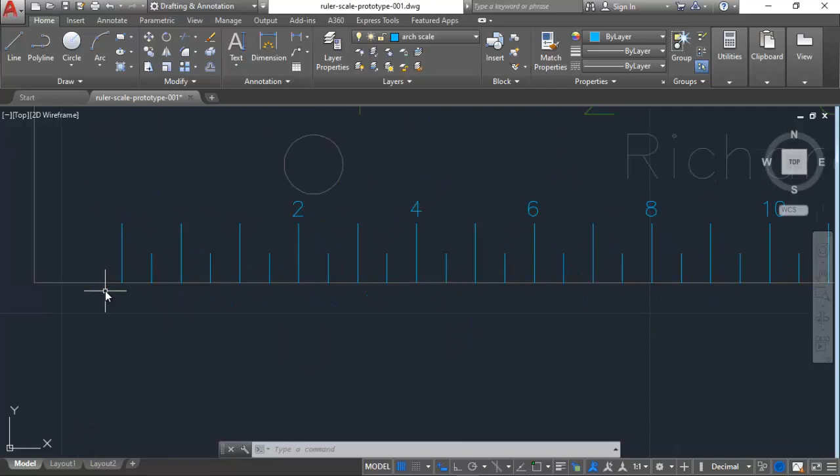So let's get started. I'm going to come up to this area right here and double check my text to make sure it's set correctly. I'll go to Manage Styles. It's definitely set to the dim.shx, which is what I want, and I got it set to a 16th. That's good. Go ahead and cancel that out.

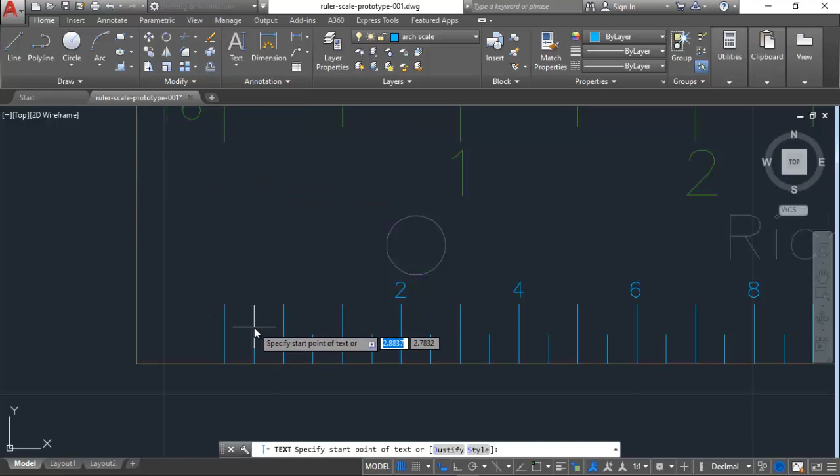I'll come up here and go to single line text. I'm just going to go about right there, and set an angle of 0, and put in the number 0. Then I'm going to come up here and click off to the side, and hit the escape command to get out of that.

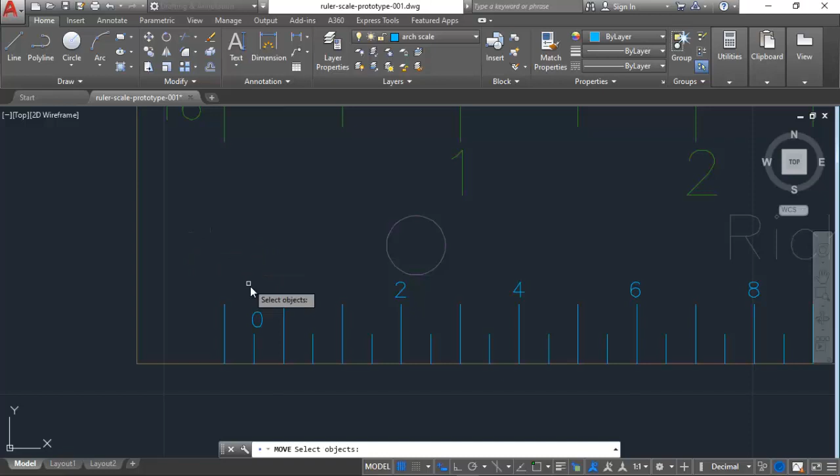Now let's go back and recheck here. I have my snap modes turned off, and my polar tracking turned off as well. That's good. You've got to have that, because when you try to move something, if polar tracking and snap modes are on, the text is going to be hard to move and get where you need it to be.

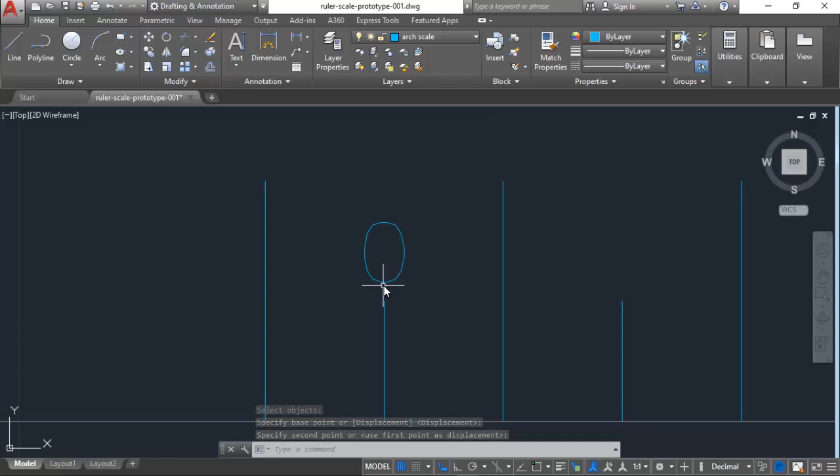So let's just kind of pan over and move this up. It says select objects. I'm going to select it first, hit the space bar, or enter, and set a base point here, and move it to about right there. Looks good. I kind of centered my crosshair up over the 1/8 inch mark here, as you can see it lined up that way.

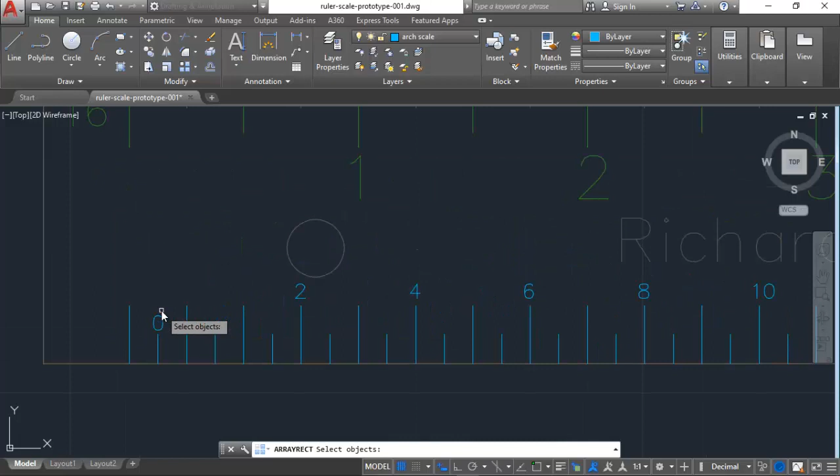Looks good. All right, now I'm going to zoom out, and it's pretty good right there. I'm going to go up here and set the array command, rectangular array, and it says select objects. You can see, I'll zoom up here, it highlights this. I'll hit that, and it's got this little matrix here. Well, that's not what I want, so I do have my settings that I know I want to work with.

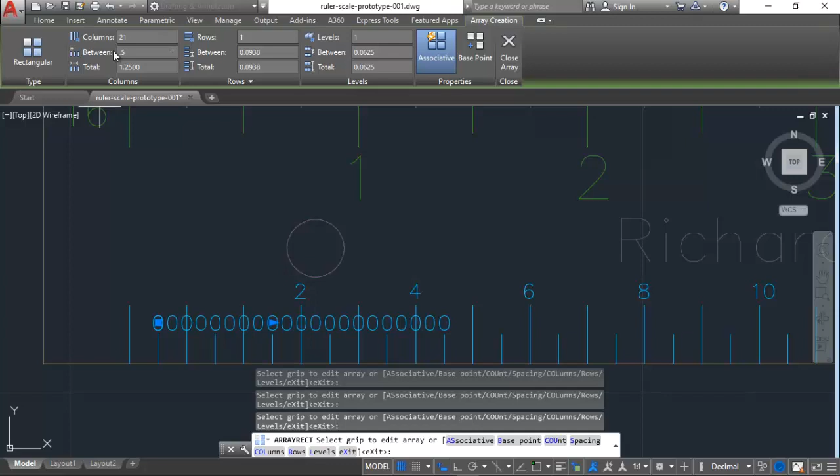I'm going to go with 21. I'm going to highlight this over here to 1 row, hit my tab. Now if you set up here and key something in, it doesn't change. It's only when you drag your crosshair down into the design space area that it makes a change. Now I'm going to key in 0.5, and again I move out, and sure enough, there's my change.

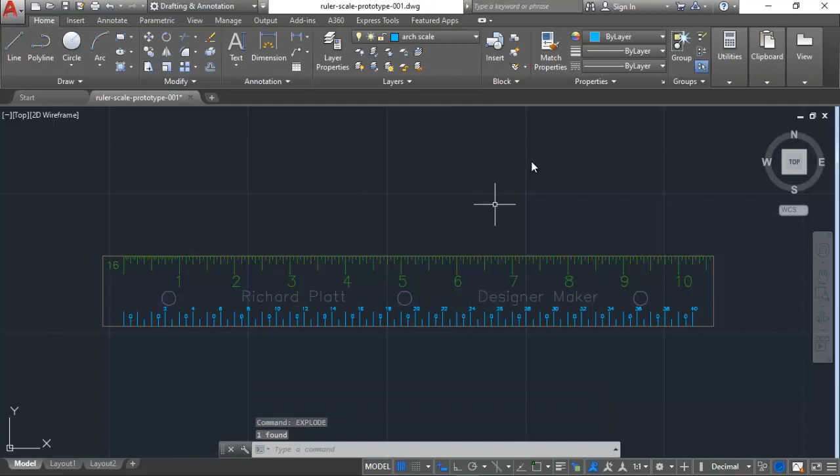So now you can see a series of zeros going all the way across there. That's good, that's what we want. So I'm going to go ahead and hit exit out of that, zoom out one more time. And what I want to do now is highlight all that text, and key in explode, E-X-P-L-O-D-E. Let's get that in there. Okay, and I'll select, yep, it's exploded all that text.

That's good. Okay, so again, on an 1/8 inch scale, it goes from right back to left. So my first number is correct, and every 4 tick marks, 1, 2, 3, 4, is the next number. It's basically based on 4 feet. So I'm going to select that piece of text there and take it to a 4, and then do this right here with this piece of text, and take it to an 8.

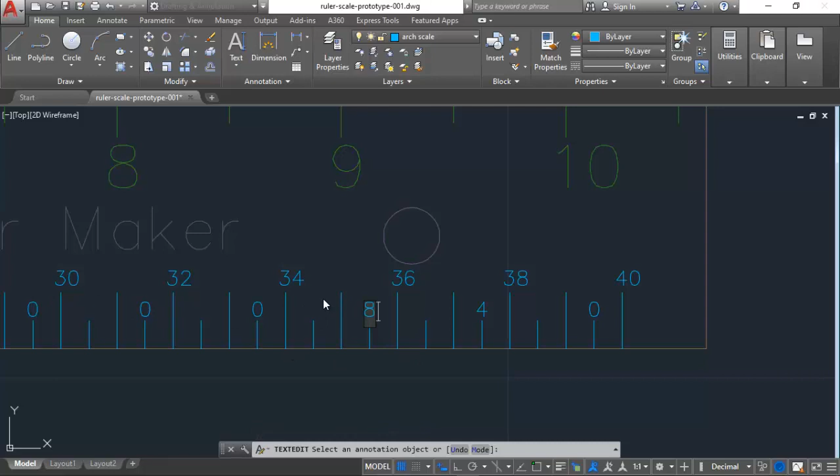So what I'm going to do now is scale up to this part right here, and we've got to put in the 1/4 inch scale designation. So I'm going to go ahead and use the copy command.

I'm going to grab this letter number here, select that, and specify a base point. I'll come over to about right here and place that in. Then I'm going to edit that using my text command, double clicking on it.

There we go. In this case, I'm going to enter 1/4 inches, using my double quote symbol for inches, and then finish that entry. I wasn't going to hit enter, just entered that, and it's done.

Now I'm going to copy that as well. I'll hit select, select the base point here, and pull that down to there. Then I'll edit this, making sure I got it correct.

That's it. So I'll double click this and say equal 1 single quote foot. Let me make sure it's an equal sign. Equals, and I'll give it a space for a little better readability. Okay, good. Now I have my scale designation here.

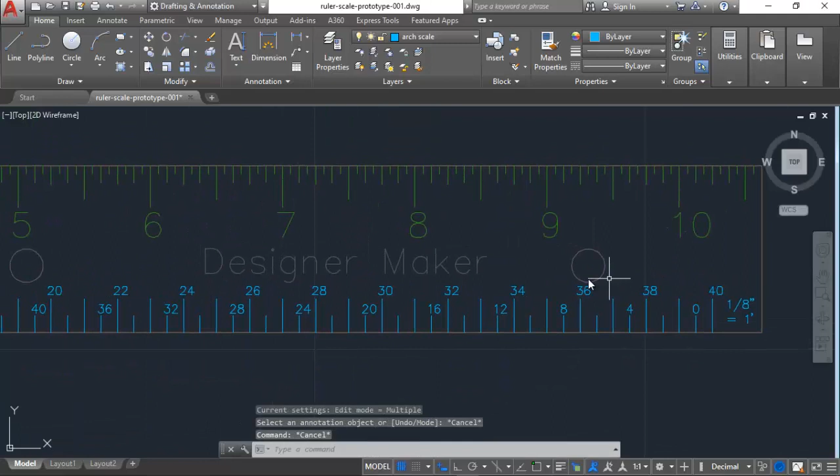Let's take a look at it. Now, I may have to come back and modify this, but for right now I think I'm going to be in good shape. Actually, I think I'm in really good shape. So let's pull that out, take a look at it, and let's go ahead and save our file.

And now what I want to do is come back to this in a moment.

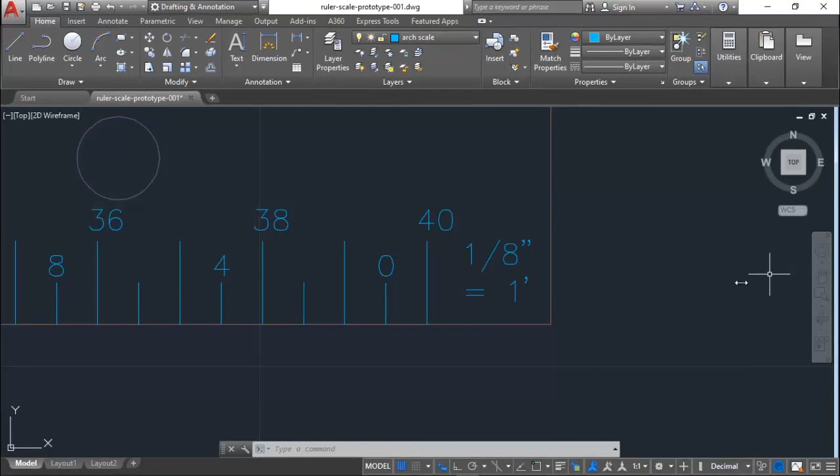Alright, now what I need to do is give the inches designation here for 1/8 of an inch. I'm going to zoom up pretty close to that so you can see it better. So let's double check some things.

Let's go down here to our dimensions and measure from here. I need to turn on my snap modes and polar tracking, particularly the snap modes. I'll click from here to there. Okay, that's 1/8 of an inch.

All right, so what I want to do now is divide that 1/8 of an inch by 2. I'm going to come over here and select my offset command, and give it a distance of 0.0625, which is 1/8 of an inch divided by 2.

And I will select this object here, and come over to that. All right. Now what I want to do is make that half the size.

So I'm going to come over to my line command, get my bisector or midpoint selected, and come across to that. Now I'll go to the trim command up here in the ribbon, select these two objects, hit enter, click and trim that off, hit escape, select him, hit my E command for erase, and there I have that half designation done.

Okay, now to see this on a laser engraver it's going to be kind of tough to see, because of the fidelity of the line that we need to get. The laser does a great job, no question, but we're going to have to divide this now by 2 as well.

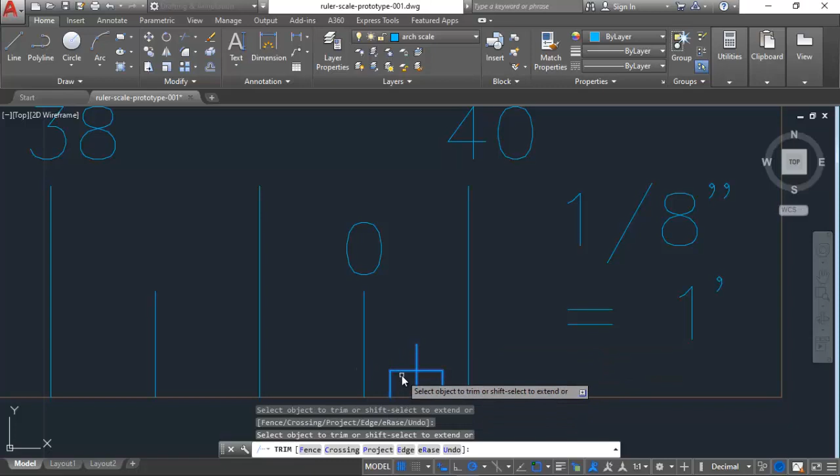Again, I'll do my trim, which is going to allow me to select these two objects. Hit enter, and then I'll trim this one, and I'll trim this one, and get rid of him, and get rid of him. Hit escape, just select him, he's gone.

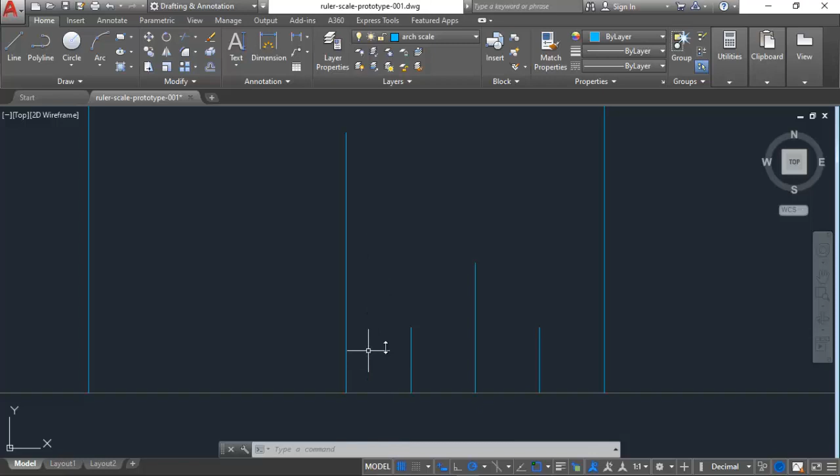That's pretty close, but when you look at the size of this ruler and you're trying to do something in 1/8 inch scale, you'll have to fudge between these areas, within a 32nd, which would actually be a 16th. But if I laser it, it'll be a 64th. If I copy these and divide them, the width of the kerf of the laser beam will be so big that you won't be able to see it on the actual scale. So that's just the way it is.

Let's do the same thing for this guy. We're going to use the offset command. We know that from here to there is 1/8 of an inch, so we'll specify a distance of 0.0625, hit enter, and select this one, here, there, and we'll do the same thing to these other ones over here.

Now we're going to use the midpoint and draw a line from here over to here. We'll escape off that. I'm going to use the trim command, select all these objects, hit trim, and trim these out. That looks pretty good. Now I'll hit escape, grab that line, and delete it.

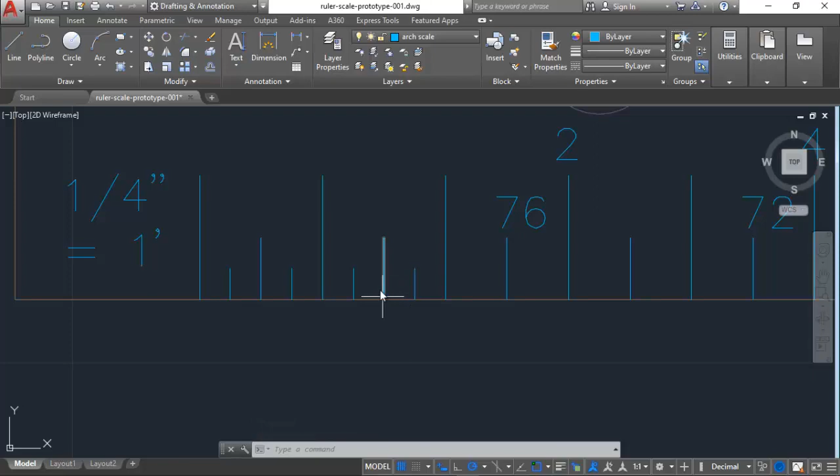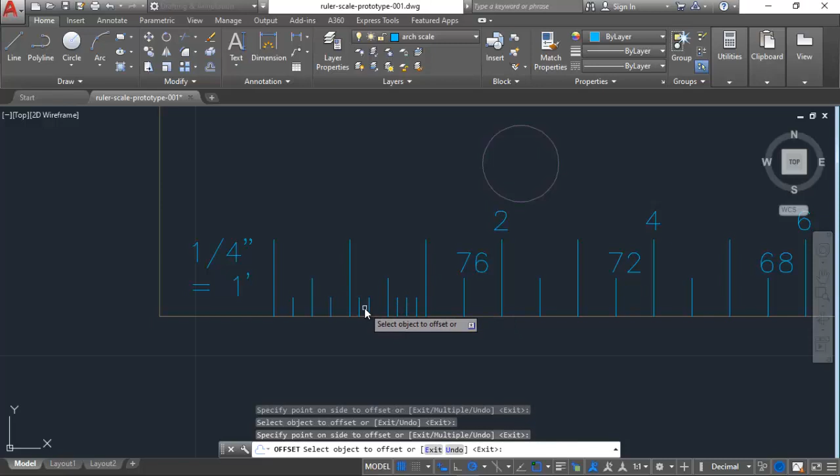I can make those a bit smaller from this point. Let's zoom out and look at this in reference. Yeah, I can probably go one more on these. So I'll hit the offset command again and key in 0.03125, hit enter, and specify my offset here. It's getting small, but let's see if we can make this work for us.

To make this a bit easier, I'll draw a line from here, go from about right there over to here, and then come down. I'll do an offset here, let's go 1/16 of an inch. That's too much, we'll go 32nd instead, so that would be 0.03125. Yes, much better. Select him, delete him.

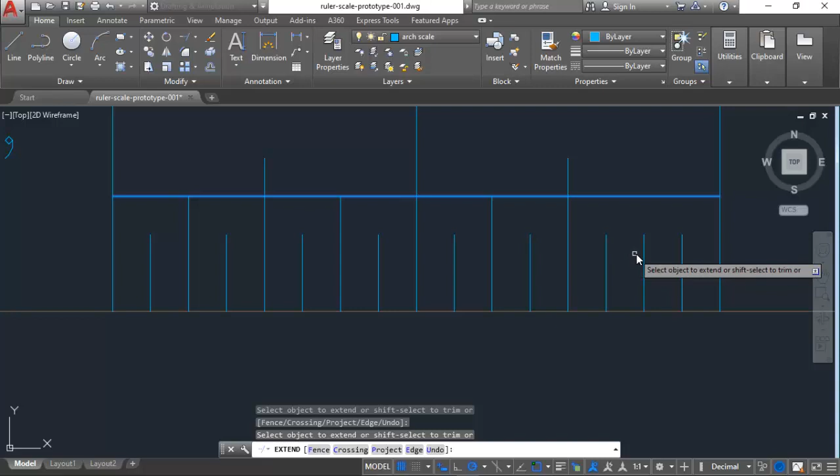Now we're going to extend these. We'll hit the extend command and select this object and this object, holding shift down to get all these. Hit enter, then select up to here. Let's go to project. Let's try this again. There we go, we'll do that again, and this guy here, and this guy here. That looks pretty good. Now let's get rid of that, delete that, and do a zoom to extents.

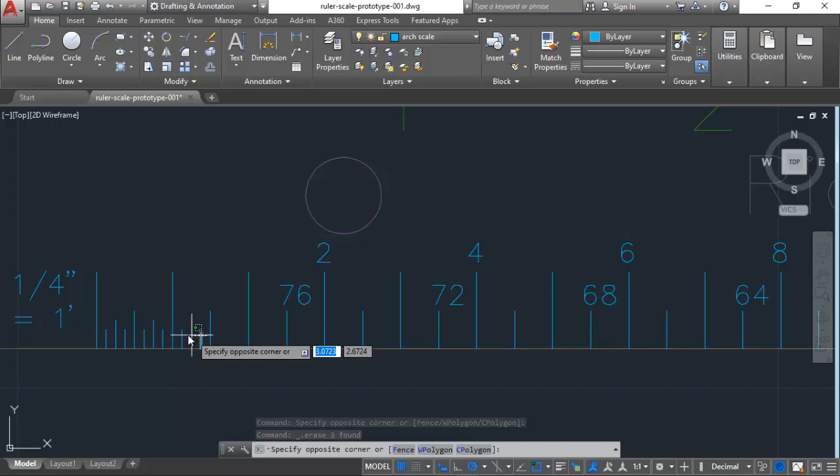That looks excellent. Looking at my ruler again, I think I actually made a mistake here. I need to go back and blow these out, I didn't need those, so I'm going to select these and hit delete. That's much better, get rid of those. I kind of overdid that a little bit, but we'll work with it from that. That's perfect, that's exactly what we want.

Essentially, our ruler scale is now complete. Let's go ahead and stop for a moment.

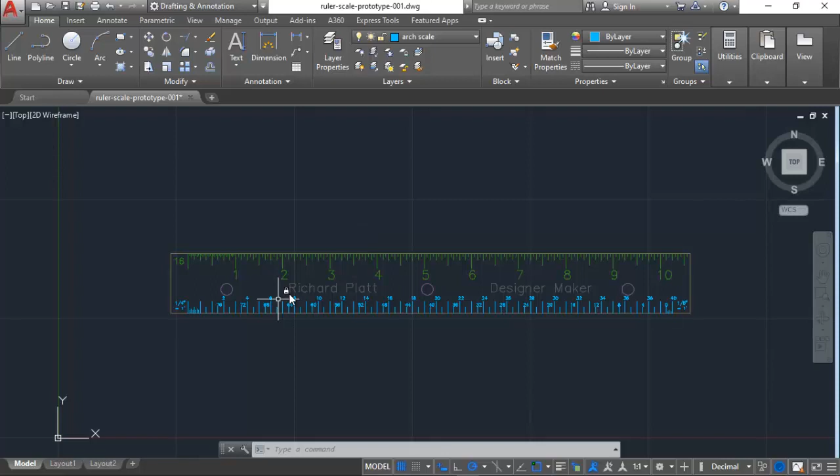The next thing we're going to do is get this ready for the laser engraver to process it. One of the problems that most students and people run into using the laser engraver in RDWorks, the software that controls the laser, is text. So we have to take our text and explode it back into basic graphics.

I'm going to select this and go to my Express Tools, right next to the A360 tab, and come over to Modify Text, and hit Explode. See the abbreviation where it says TXT EXP? We don't have to go that route on the ribbon every time, we can just key that in, TXT, EXP, and we're good to go. Now if you notice, now that I've selected that text, it's no longer text but graphics. That's good, that's what we want.

Let's go down the line. Remember the last command we used, we just hit the space bar and it says select text to explode. So I'll select this, and this, and enter. That's exploded. Let's go back over here to this one, that's not exploded, hit that, and now that's exploded. Hit the space bar, it says select text objects, hit this, and I'll hold my shift key down so I can get two of them at the same time.

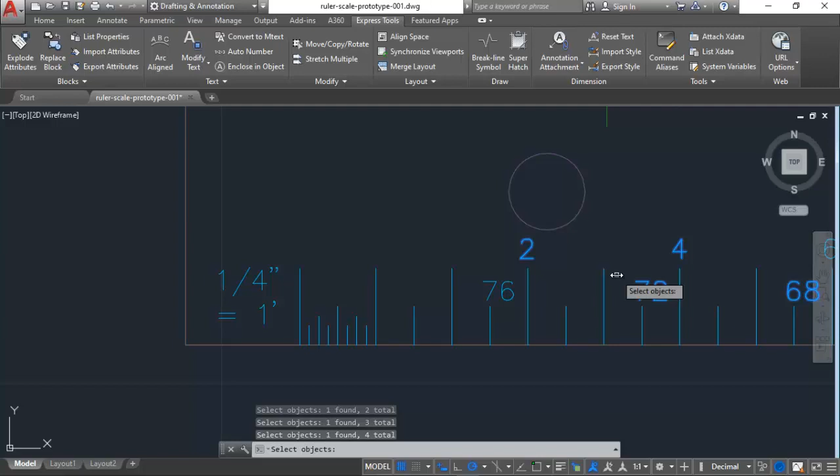Oh yeah, got a lot of them here actually. I'll hit enter, total of 4. And all that's been exploded. That's good.

It's been exploded. If you see all these control points on there, you know the text has actually been broken. Now see on this one, it hasn't.

So I'm just going to hold my shift key down, select all these different objects. Here, here. Now, if you notice, this is locked up here. So what I'm going to do is go to Home, go down here where it says Name, unlock that. In fact, I'm going to unlock everything at this point and go back to Architectural Scale.

Select that, and we're going to hit the txt exp. Boom. And let's see if it exploded this. And yes, it did, and it kept it on its layer. That's been exploded. That's good.

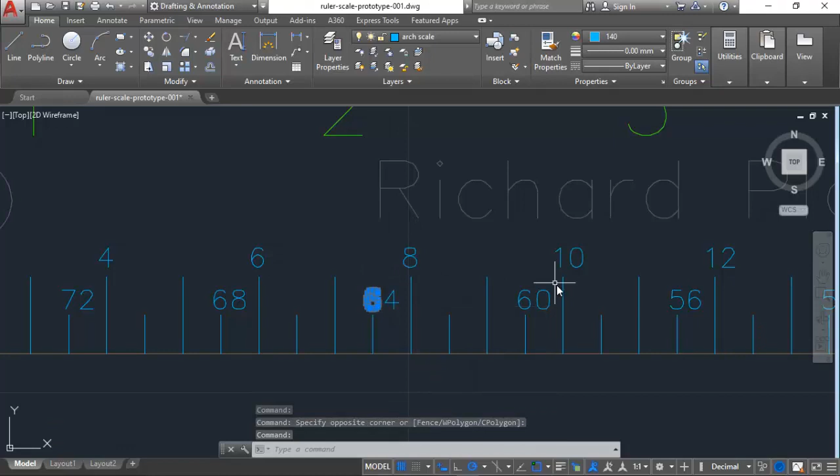Okay. Now it says it's a polyline. That's excellent.

Now if I want to, I can hit my up arrow, and on the space bar, I select this, and that has been exploded. Okay, good. Click out here as escape, hit my up arrow again.

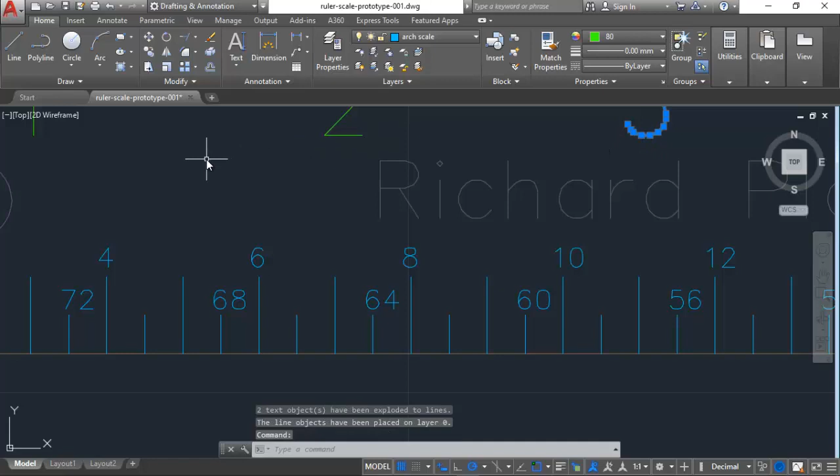And I'll select this, hold my shift key down, hit enter, and just double check. Yep, that's now polylines. Okay, let's zoom out.

Now, one thing I can do is do Control A, and I can select everything. It's just too much work. And I'm going to come over here and get the big ones I can. Hit my up arrow. There you go.

That's no longer text. That's definitely text. I'm going to hit the shift key. Hold that. That looks like it's okay.

I'll tell you what, let's just do this the right way first. I'm just going to go and hit the up arrow, hit explode. It says select text objects.

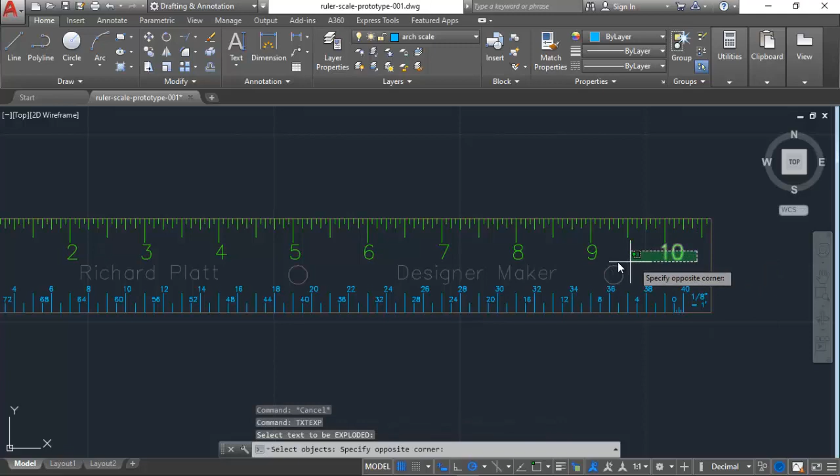I'm going to click here. Just go all the way over, and it said 7 found, exploded. Excellent. Make sure that that's exploded. Yep, that's good. And I'm going to do the same thing here.

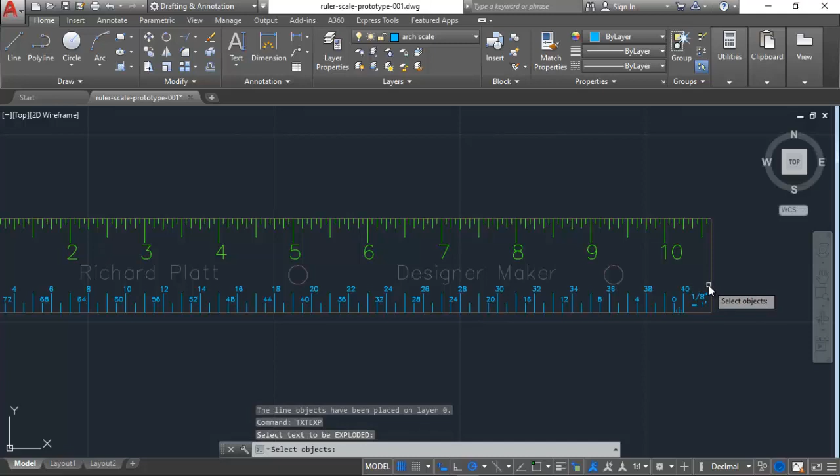Up arrow. Click here, come all the way across, and hit enter. And that exploded all that. And I'll do the same thing for up arrow again. That's exploded. And I'm going to do a selection based on this.

Tell you what, I'll come out here. Looks like that's still. These are all. It's text right there. Okay. So here's what we're going to do.

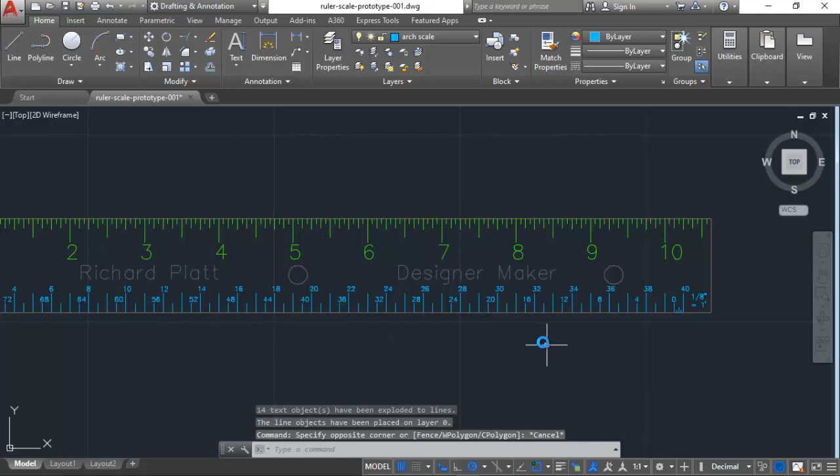We're going to do a selection like this all the way across to here. So it's only going to get the text objects. Hit my up arrow, explode. All right. So it looks like I think we've got everything exploded. That's excellent. And let's go ahead and save our file.

And now that that's saved, what we need to do now is to save this as a DXF file. So I'll go save as. And I'm going to come down here and select the oldest one, which is an R12. Hit that, hit save. And now it's saved the file.

Now, let's go to our email, which I have over here. I have my Google Mail up. I'm going to compose myself an email, send it to myself. And I'm going to key in scale, ruler scale to laser. Okay. And now I need to attach that file to myself.

I'll find my ruler and I'll look for date modified. And I'm looking for that file right there, my ruler scale prototype. And it says DXF. Hit OK. And it's attached to the file.

Now, one thing to note is that when you put these files on your computer that you're going to laser with, if you see something that didn't change, maybe you got a piece of text that didn't explode right, you can always open and edit a DXF file.

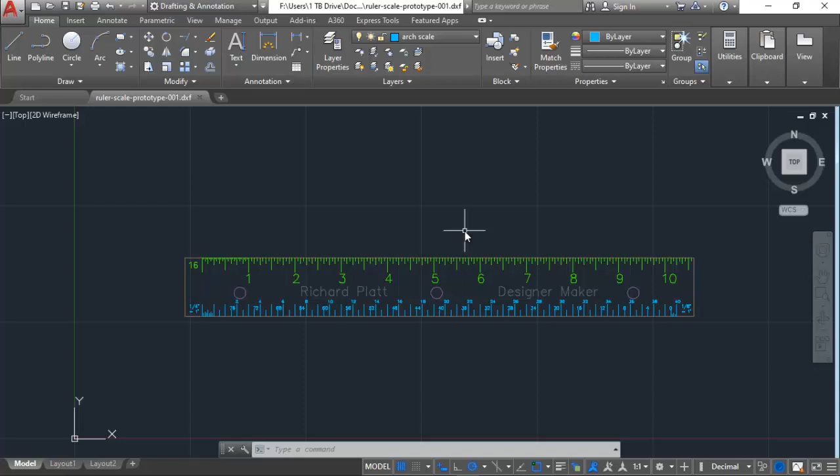Okay, let's send that. Looks like I just got an email. How about that? Go back to my project here, and of course my watch just told me I got an email. That's good. So I think we're done. Now we need to get over to the laser and get this guy lasered out.